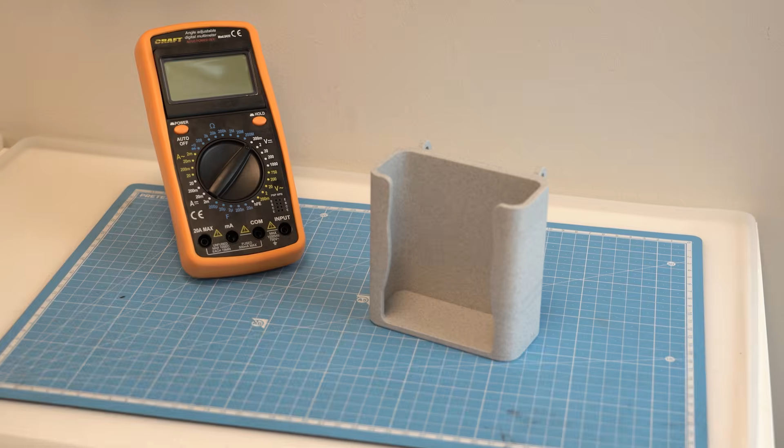We made this custom holder for our IKEA SKÅDIS board to keep our multimeter off the desk and organized. It works fine as a basic shelf, but the fit is way too loose. The meter rattles around a lot and it needs some improvement. There's nowhere to store the probes and the cables are just a mess.

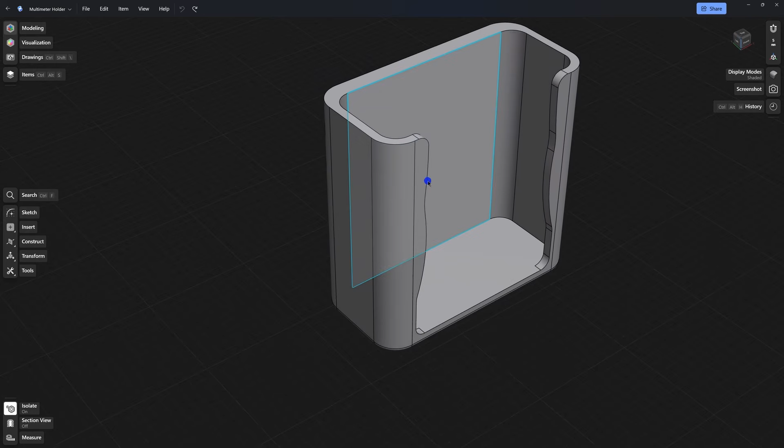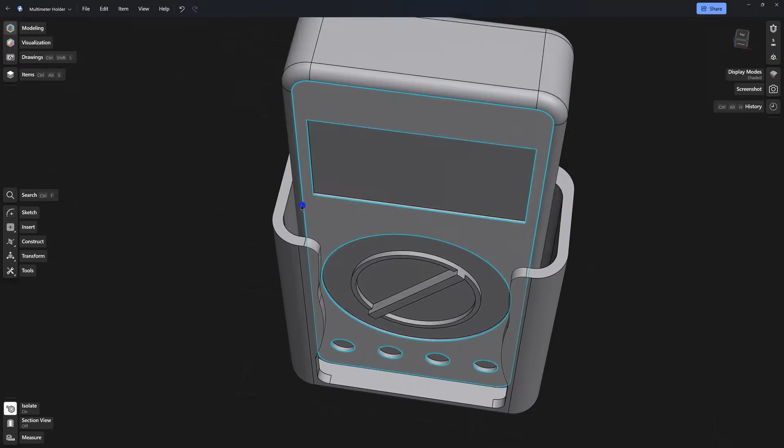Let's take this back to Shapr3D. First, let's open the original file, the one we already printed out, so we can see how to improve that solution. I'm going to import the multimeter file, which we previously designed according to its dimensions. Once the multimeter is imported, it's way easier to spot the difference and what could be improved. One tool that's super useful here is section view.

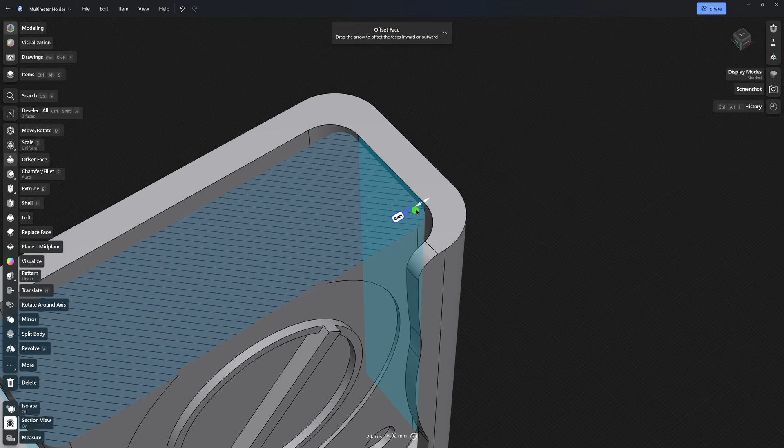I want to use section view to cut through this plane. With that, I can easily spot how big the clearance is and how much room I have to make it closer to the multimeter. So I'll select faces and by pulling I can quickly fix the issue I had before. I'm adjusting the radius of those rounded edges, and now we can move the multimeter a little closer to the wall, which leaves more room on the other side.

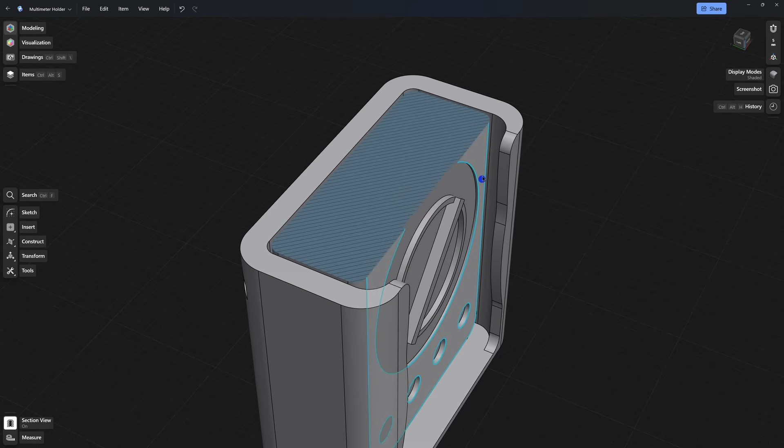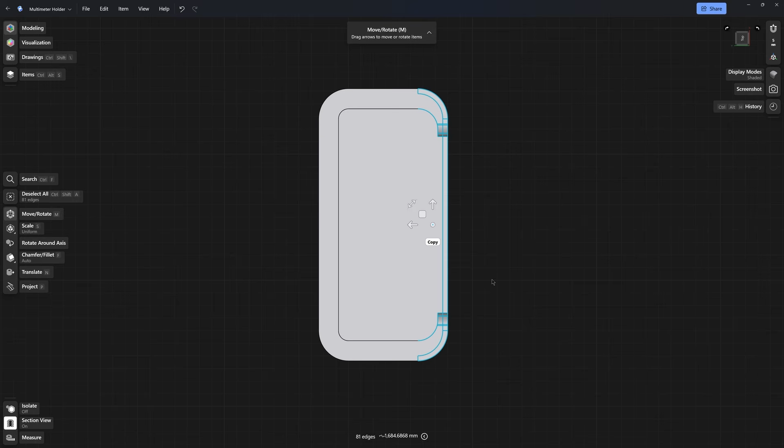Now I want to fix that too. Right now it's 7 millimeters. I'm just going to hide the multimeter so I can get a better view of the holder itself. Turn on the top view and rotate it a little because I want to select only the edges on this side of the body, since that's the way to make a stable adjustment. Now that it's done, let's turn the multimeter back on and see how it looks.

Way better than before. Next step is to create holders for the probes. So I'm creating a midplane, which I'll use to create a sketch for the probe holders.

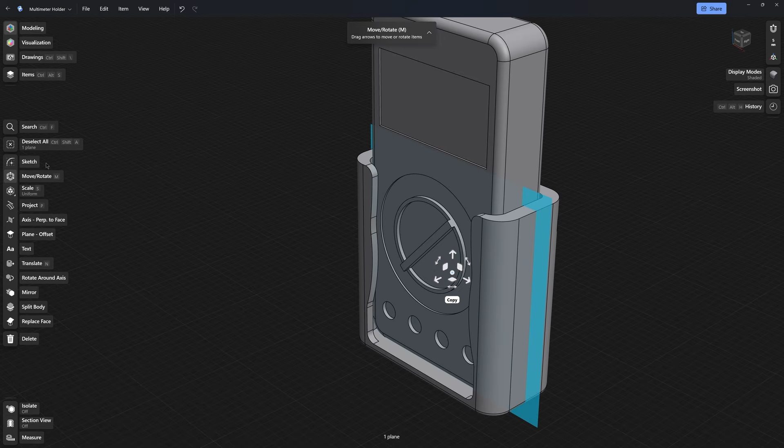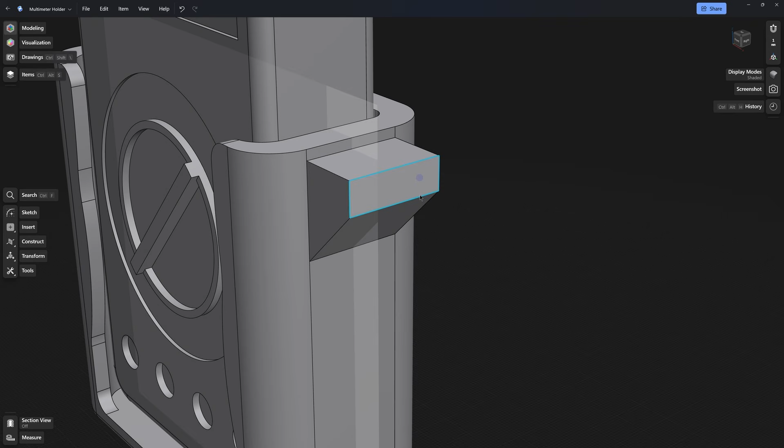Create a simple sketch, a simple shape, and set all the dimensions that are necessary. Why is this angle important? It's because of 3D printing — if the angle is 135 degrees in this case, we won't need any support, so the print will be cleaner and the surface will be smoother.

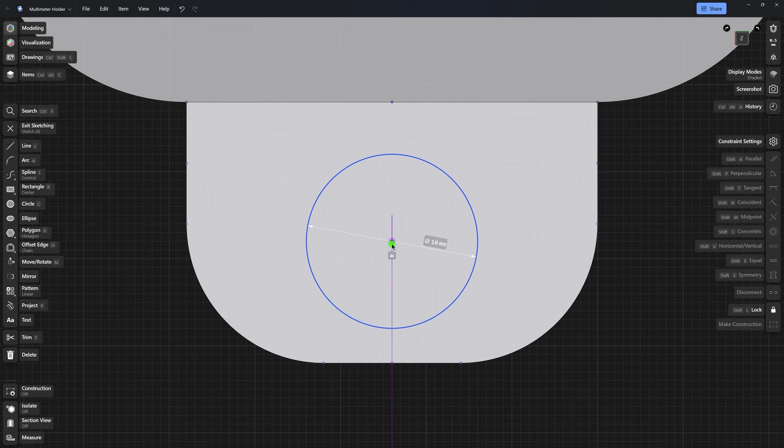Select the edges and make them round. After that, select the top face and create a circle there that I'll use to cut through the probe holder. It's very important that this dimension is big enough so there's enough space for the probes. Let's design one rectangle, select all three profiles, and cut it through the body.

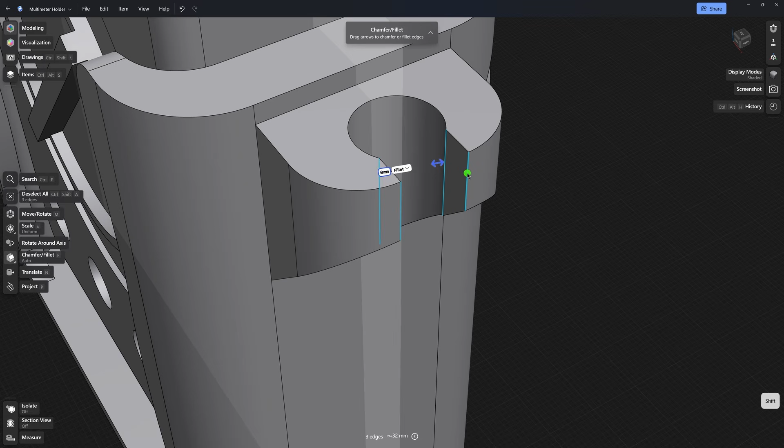After that, we can hide the sketch because it's a little in our way. Select edges and round them slightly so the probe can easily fit into place. Let's round those edges a bit more so the print is a bit more appealing.

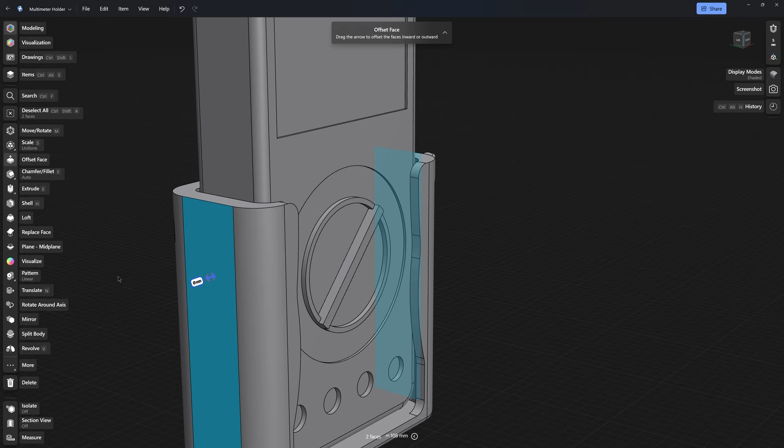Next step is creating another midplane after hiding this one. I select one face and the opposite face, and in the menu I select midplane, which automatically gives me a plane right where I want it, because I want to use mirror to mirror this part of the body to the other side.

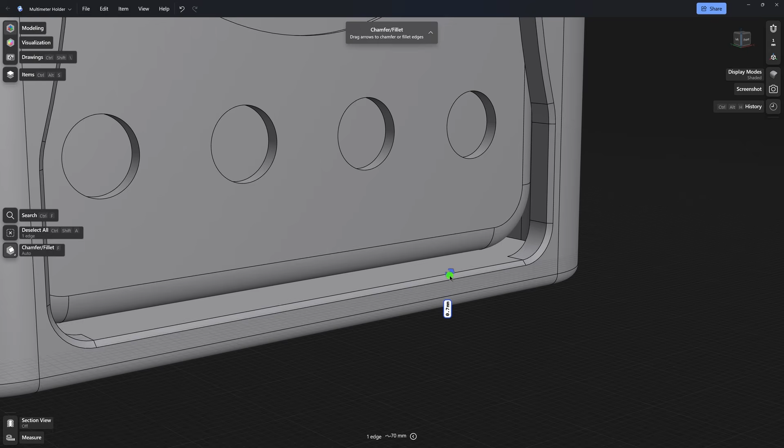Now I can select all three bodies and use union to make just one body. I'll add a chamfer here, and here I'll add a little fillet so the print is cleaner. Now I'm going to select only the multimeter holder and isolate it, because I only want to print out this part.

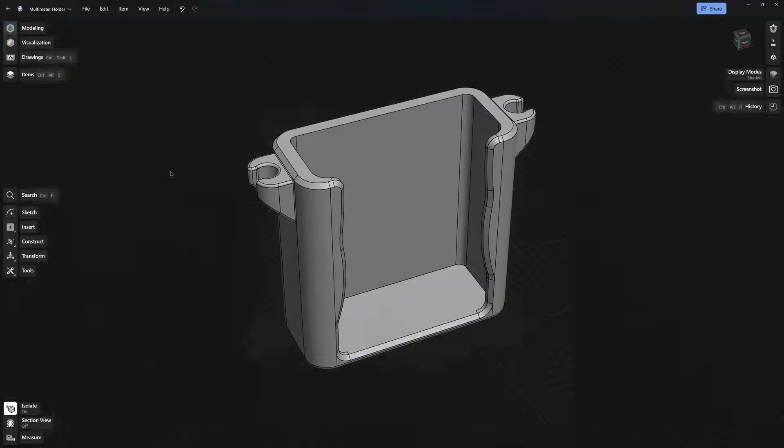Go to File, then Export. When you open the export window, you can send it directly to the slicer. In the slicer, you define your 3D printing parameters, and after that you can slice the model. The model is ready — let's print it out.

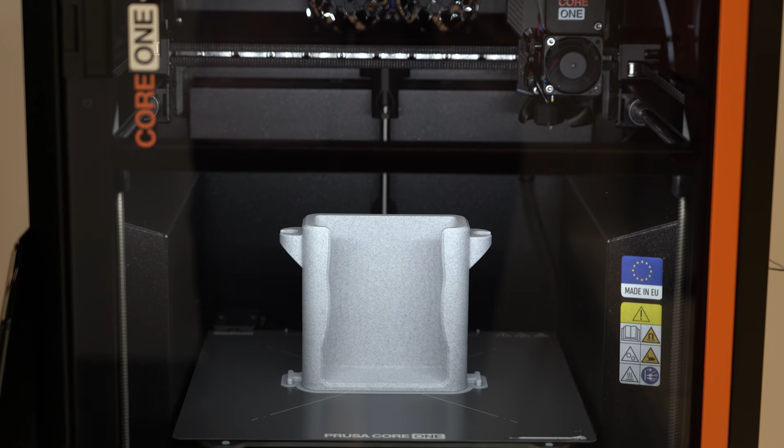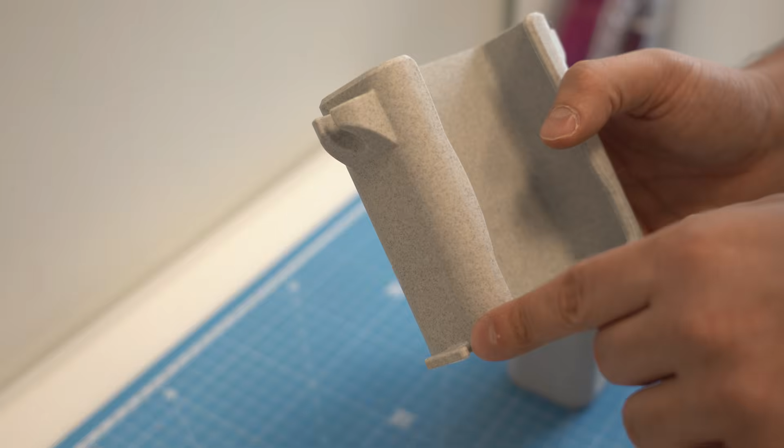Alright, the print is done. Check out the difference — the new version has a much sleeker profile, built-in probe holsters, and a dedicated cable wrap.

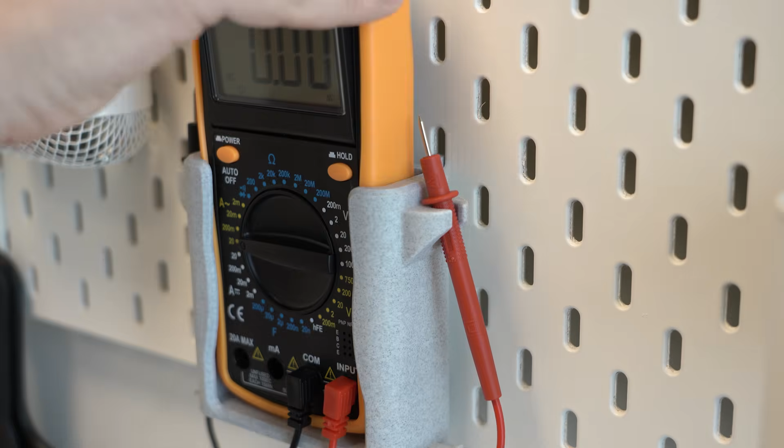Let's mount it on the board and test the fit. The multimeter drops in perfectly, nice and snug, with no more wiggling. The probes also slide right into place. The best thing is I can use the multimeter while it's on the board, and it's not in my way on the working table.

Now it's your turn. What design are you going to glow up?